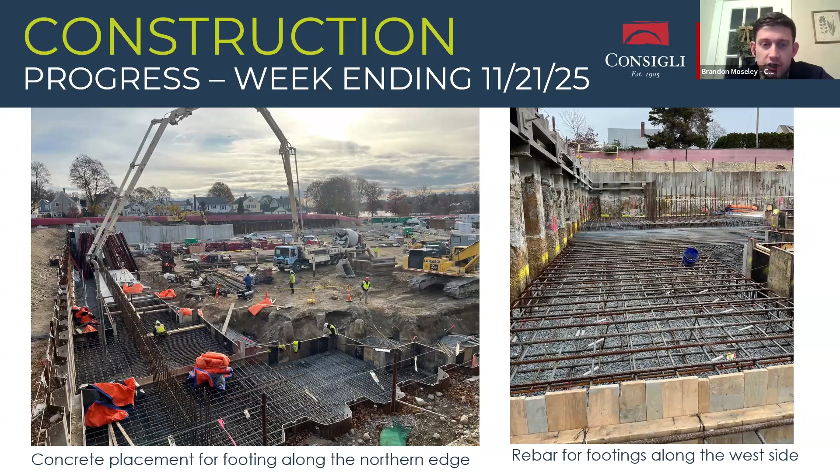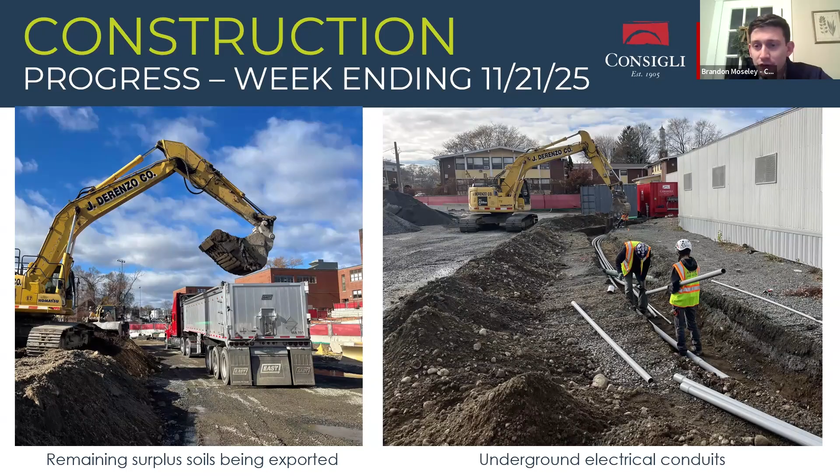Anise, our electrician, was on site doing some underground conduit work, which allowed us to also do some paving today. We did what we could under the parking lot and got some pavement down ahead of the worst of the winter. We got lucky with some nice weather today and for the next couple of days, which is great.

This is the rough grading that happened a week or two ago at that parking lot area, which is now all completely paved with asphalt.

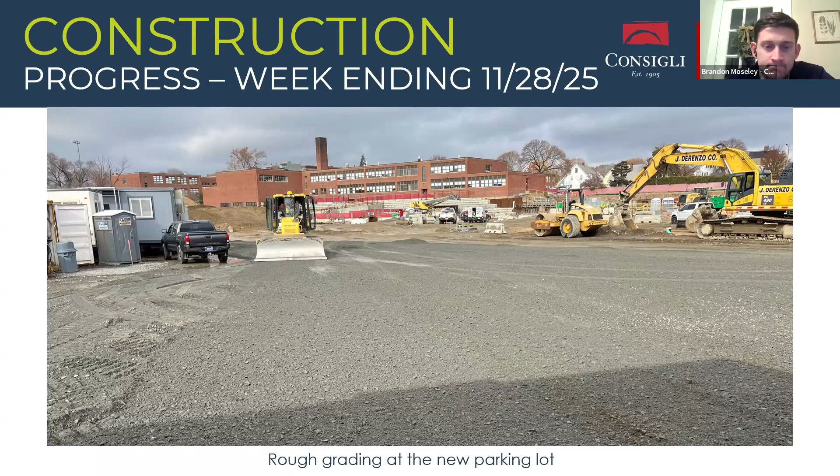This is a shot of a crane that was on site two weeks ago for the install of our grease trap. That exterior grease trap sits just outside the foundation footprint. It's buried underground, takes all the kitchen waste from any grease producing fixture, filters through there before it goes into any sanitary system, and then that's pumped out at regular intervals. So that's now done and buried, which is fantastic - another big underground element we can put behind us.

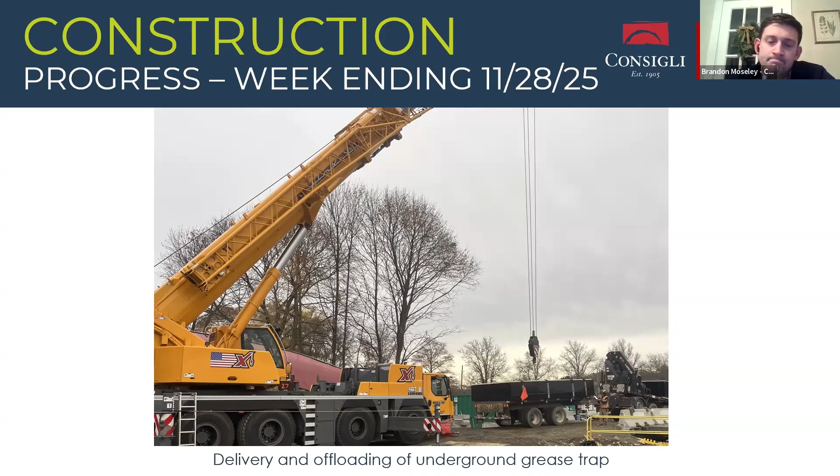This is a shot of the formwork up at that same area we looked at in the first set of photos. One side is up at this point, the week of 12/5. We've since now placed these, which is great.

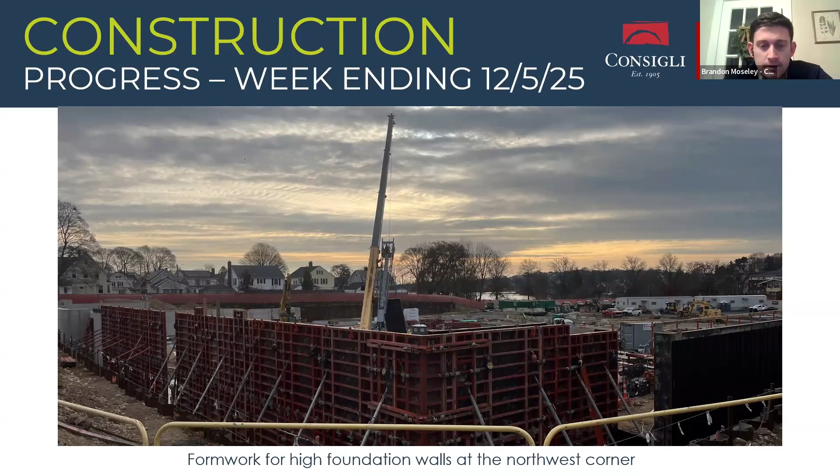Another shot of the foundation walls being complete. You might notice the different patterns here - you can see kind of vertical patterns where we did some form liner work. That stuff will be exposed as an areaway in the finished condition, strategically inlaid within the formwork to provide a more architectural finish that you'll see.

All these box outs here actually come into the main electric room, eventually coming in through the first floor up into the main electric room and into the second floor mechanical room. That was all pre-planned - MEP coordination has been ongoing, so those are intentional box outs to make sure we can get service into the building when we need to.

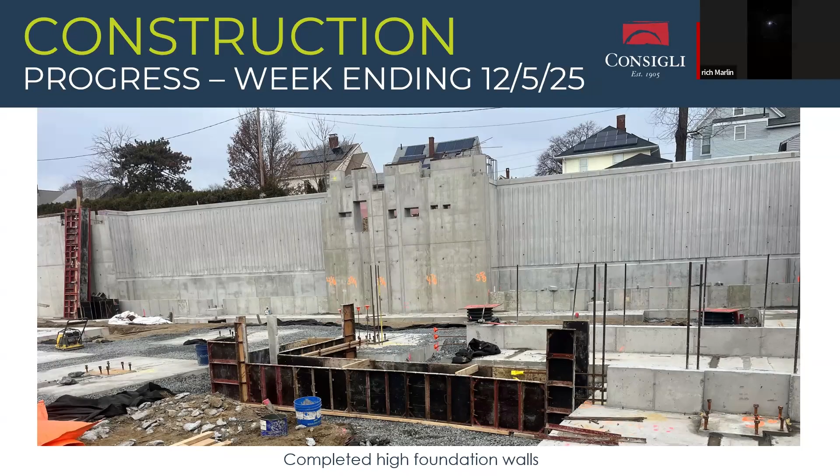Another activity we were working on just after Thanksgiving for the last couple of weeks was getting back to that Sisson ramp, the switchback ramp we turned over last summer. We had temporary railings in and had done our field dimensioning for our permanent rails. Those were fabricated and have been installed - I believe they set the last sections today. They'll be doing some welding of corners tomorrow, and we should be completely demobilized with that all complete by the end of the day tomorrow.

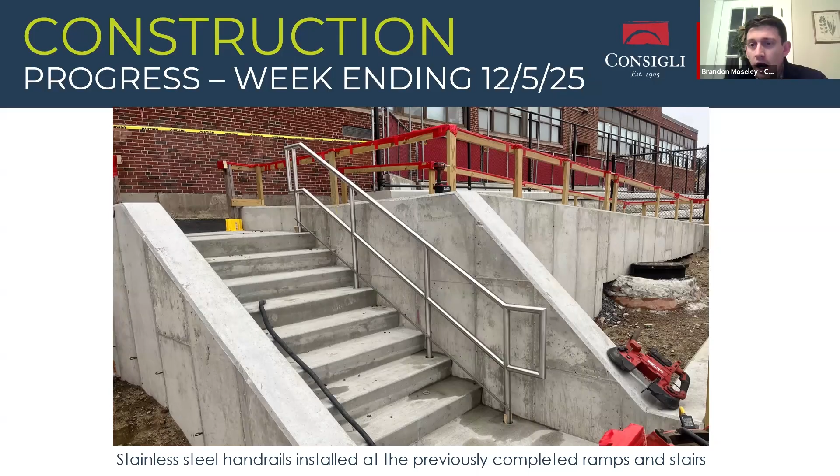Just big picture, I want to touch on schedule-wise. We've been talking about concrete being complete, moving on to steel, so everyone knows what to anticipate. We do have the crane coming on Monday - it'll be erected, so you're going to see that go up in the area of the building footprint. Our first steel is going to go up next Tuesday. Huge milestone for us to be starting just before the holidays and working through the holidays with the first section - great milestone for the team as we transition from site work and concrete into structural steel.

Mr. Mannion asked if the steel is on site now. The steel is not on site right now - we're going to see our first trucks on Tuesday morning, about 8 or 9 trucks. Some have slowly been ferried down from Canada into a temporary landing spot in Massachusetts to get ready for this. So some of it has made its way over the border, but nothing is on site yet.

One last quick question: how much longer can you put down the bituminous top coat? It's all weather dependent. We got lucky today - as you may know, the plants do shut down, and that's also a fluctuating date, but they've stayed open. We got the bulk of what we wanted done today, which is great. The large parking area just west of our trailers got done, as well as one of the two main entry roads.

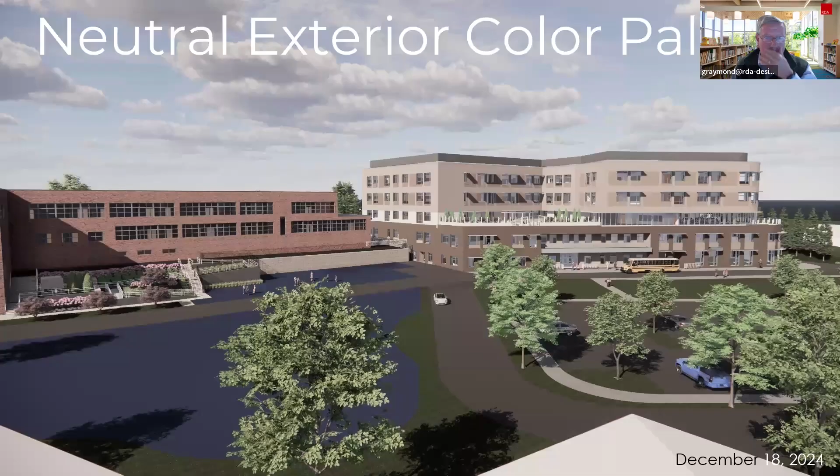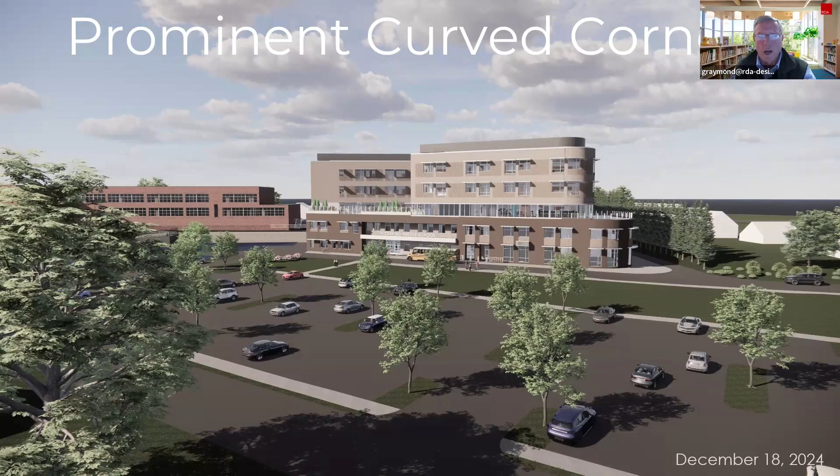So again, you saw these, you've seen these since a year ago. So we have the kind of neutral exterior color palette, and we have curves on the outside of the building responding to the site. We didn't want to have any sharp prows. And then we brought those curves into the building, where we have interior cores, and this is the curve on the cafeteria.

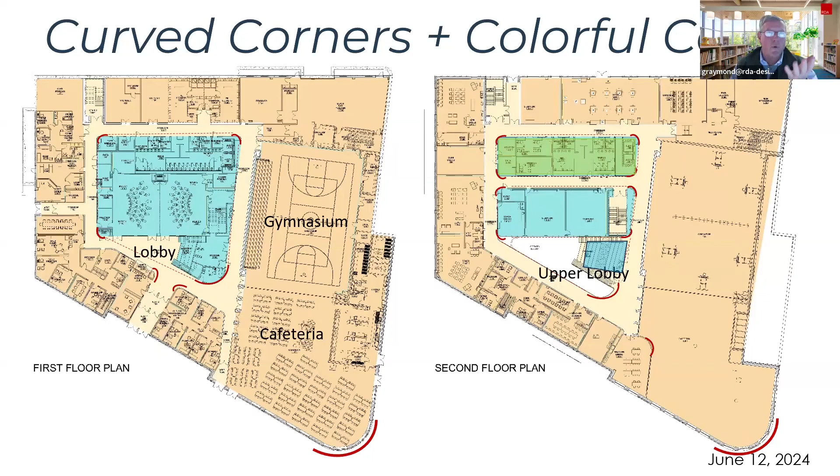The other thing that we had organized the building around, and I know you've heard it all before, but we have perimeter spaces and we have these interior cores. And so we've been focused on trying to give the interior cores various color patterns so that it's kind of a wayfinding device, and people inside the building can understand, as they use the building, where they are.

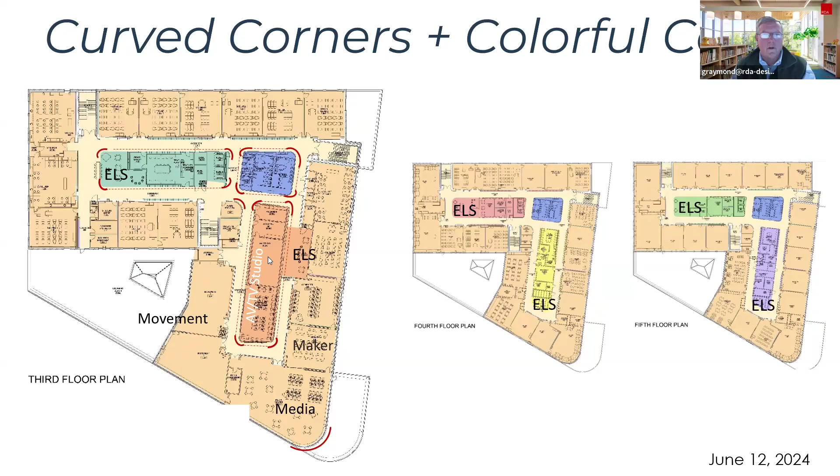We have like three cores typically on the upper three academic floors. And each one of the, well I'm going to say the toilet cores, we're trying to keep just consistent, but then the grade level academic cores, we're trying to have different colors. And so far that's worked out really well.

Where we were on November 19th, which was the last time, we had very saturated, very intense colorful patterns of tile on all these cores. And one of the feedback comments that we got was, wow, it's really powerful, and it might be too powerful.

And then we also had in the corridors, not the cores themselves but the other walls, more neutral colors, but still a pretty intense amount of pattern going on. So we got some feedback, and we went back and worked with the subcommittee and looked at some precedents.

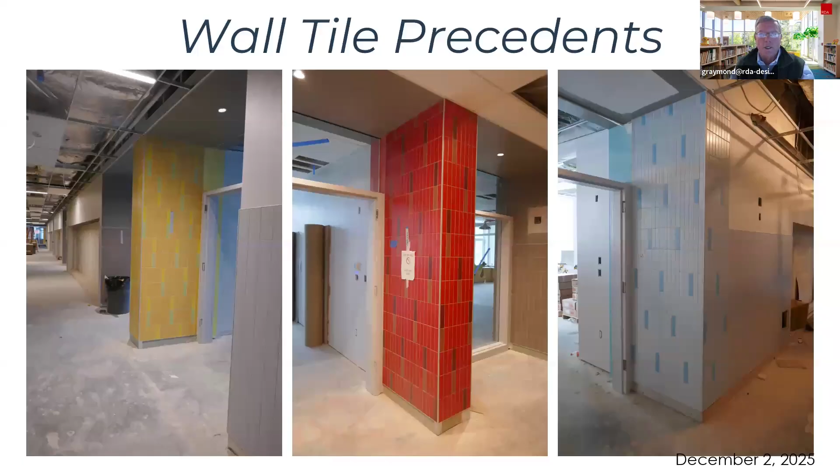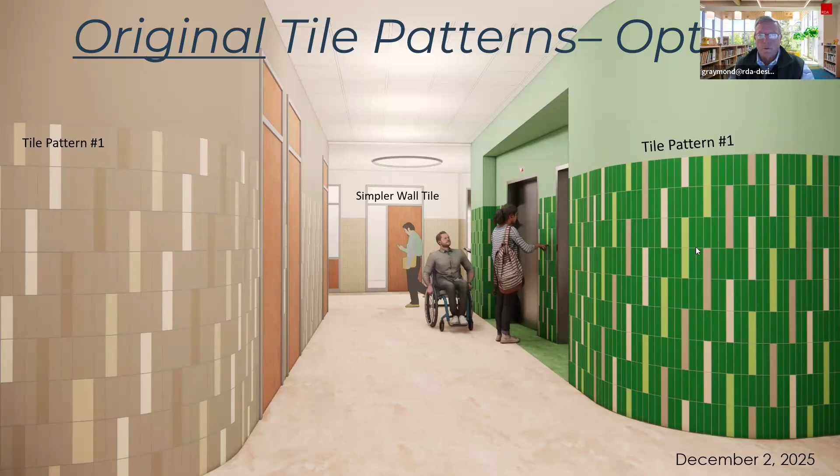But let's also take a look at this, which is very intense, a lot of green and a lot going on with the other accent colors. Let's flip it, so the field color becomes more neutral and the accents become the green. So we looked at a variety of patterns, and we went from this very intense one, where the field was green, to the field now being a neutral with green accents. This is the second tile pattern we looked at.

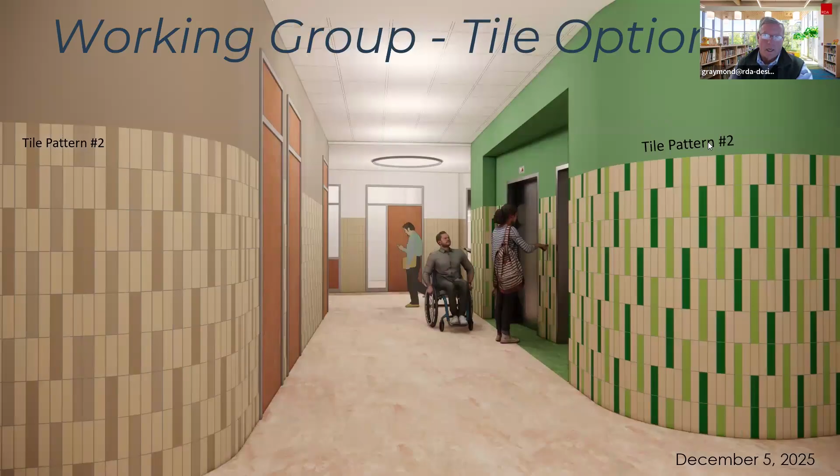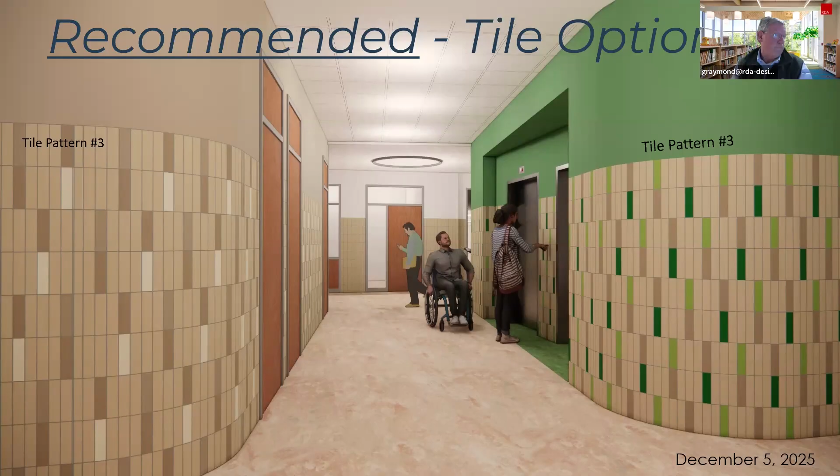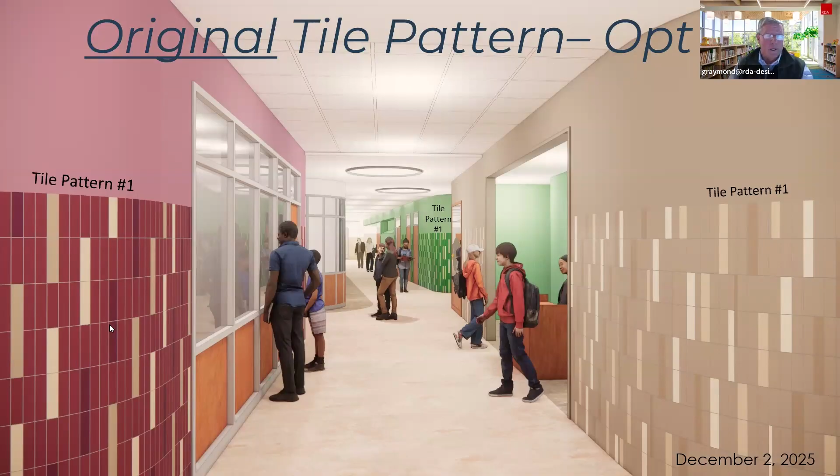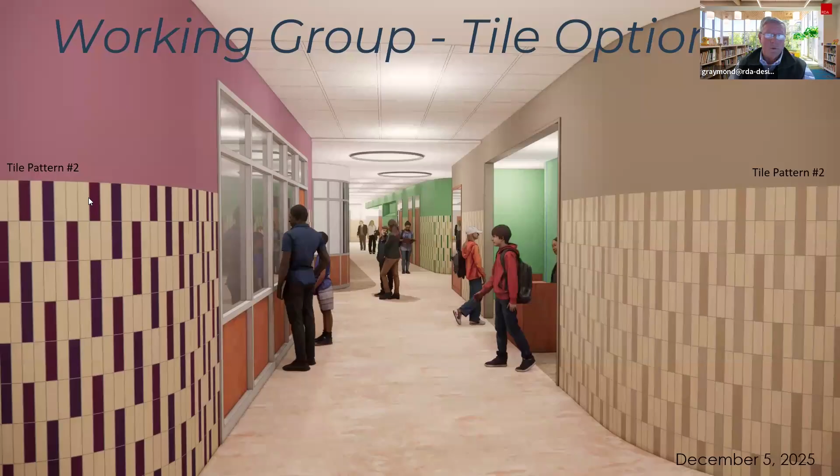So the same thing happened - just another example, but one of the other cores is kind of a purple color, and the original pattern had a lot of purple in the field with some other accents. Again, we flipped it so there's more neutral in the core and colors as the accents. This is tile pattern number 2, which we didn't pick. Tile pattern 4 was a little too dispersed, and we landed on tile pattern number 3.

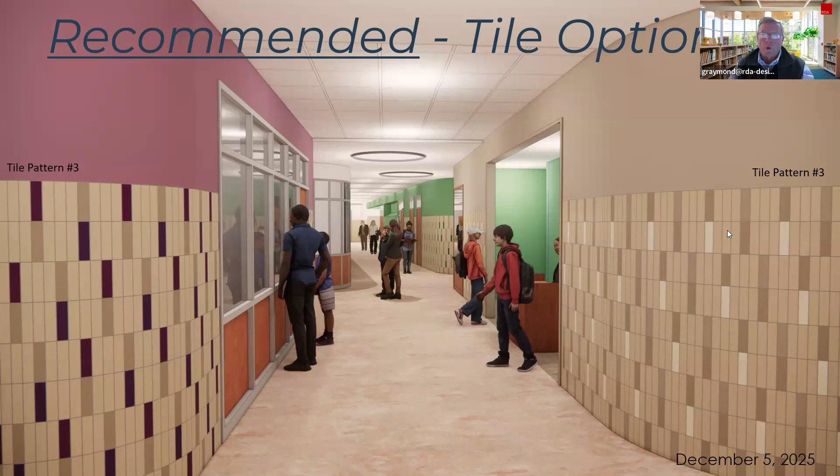I think this is really nice because you still get the pop of color with the painted gypsum board. You can't see it here, but there are lockers that will be the same color, and you still have the green accent. So you definitely still have the feeling that this is a green core and this is a purple core. And then this is the toilet core, which is more neutral, but not the plain wall tile, which is where we're headed at Pickering.

So I think the question is, when you compare what it really looks like with what the computer renderings throw out, things can look a lot different in real life. And I think everyone was comfortable heading in the same direction for Pickering.

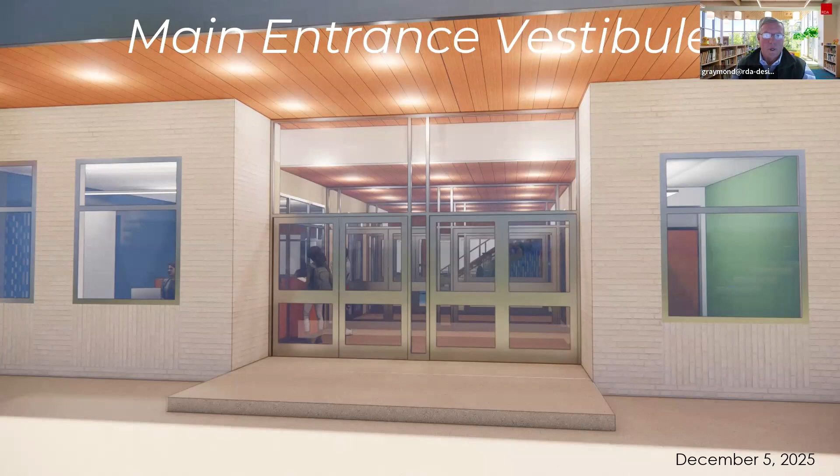So if we just take the glass out, what we are proposing, and I think everyone's comfortable with, is we have the cherry metal ceiling. What we wanted to do was keep it under the canopy outside, but then bring the same ceiling into the inside of the building so that you have some continuity as you go in.

The outside set of doors is here, and you check in, then there's another set of doors here where after you're credentialed, you can be buzzed in. But where the tile drops, there's yet another set of doors, because when you go into the second vestibule, you can go over to the service providers or into the main office, but you can't go into the school. That's for visitors and guardians coming in for meetings.

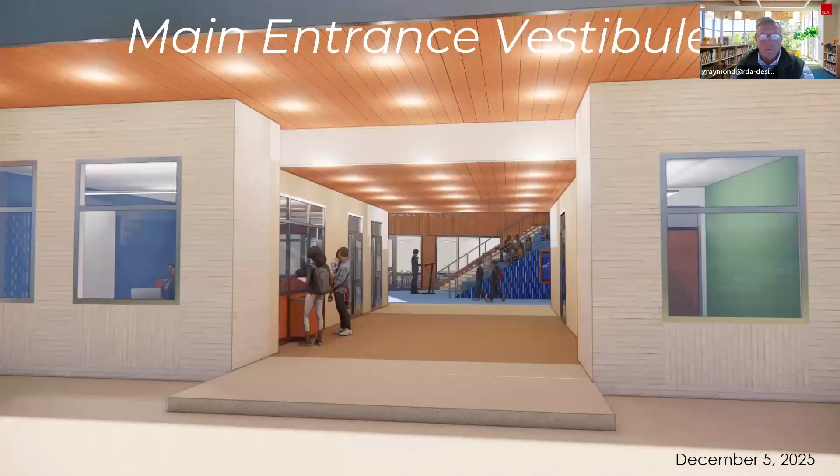So when we got into the two vestibules, this is the first one, in which the main office controls it and people get credentialed at a little counter. If they're coming into the office, they would then get buzzed in and go into the office through this door, but they can't go through those doors to go any further into the school.

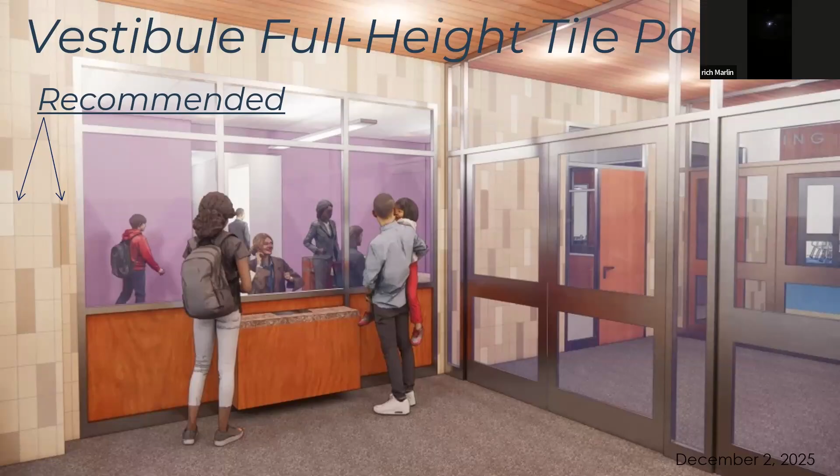In these two vestibules, we decided to stay with full height tile and keep the original pattern, because if this full height was all just one tile, it would be a bit boring, honestly. But once you get through the second one, you're into the regular corridor tile with painted wall above it, and this is where we just turn into the plain single color tile.

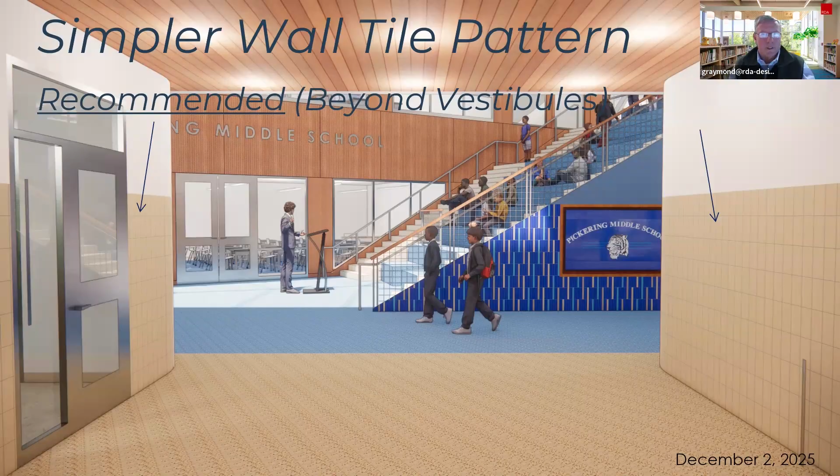Going back to the cherry, when you come into the lobby we have these acoustic panels. It's again cherry because it goes with the wood, it goes with the ceilings, and frankly it just feels kind of sophisticated and a nice finish. But they wanted to make sure of what that would look like.

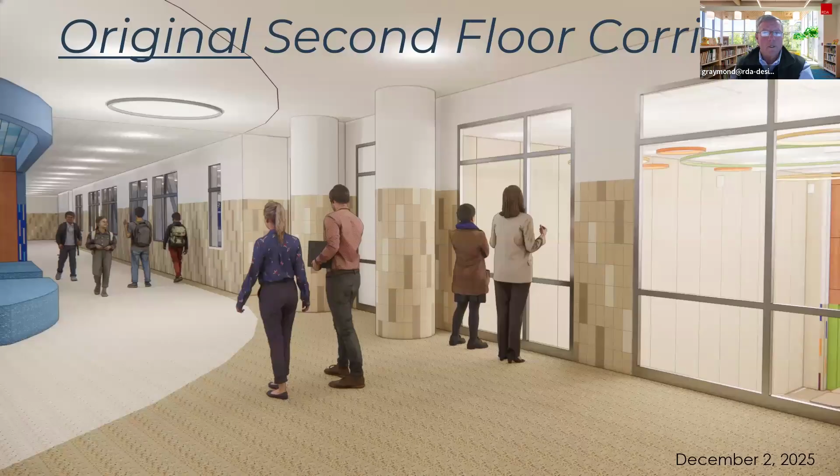This is where everyone wants to head, and frankly we're absolutely fine with it. It's just a nice, simple wainscoting. It still breaks up the height of the walls and still provides a nice, durable surface. So we're going from this, which I'll just say is a little in people's faces, to something that's calmer but still light.

The same thing happens, just with a couple different views. This is where we were, and this is what's being recommended right now.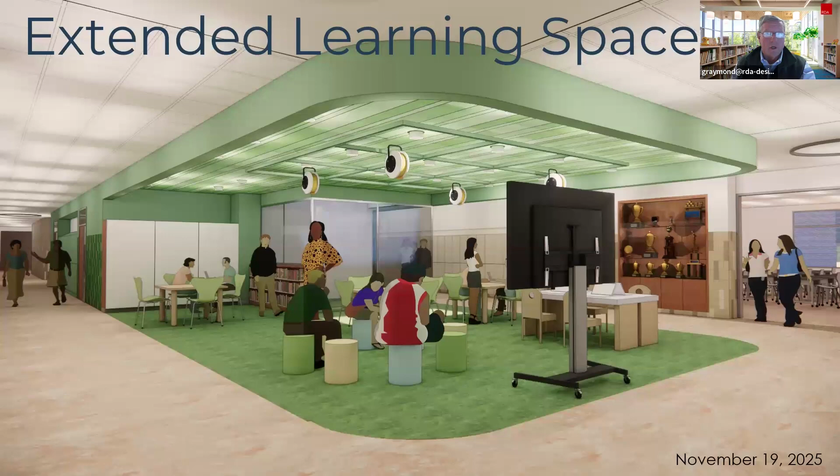So this is another view looking at it, and then this is what it would be like with what we're proposing tonight. There's one more view: you can see the original wall tile pattern and the original ceiling, and everything's just getting a lot calmer, with the single color and the warmer ceiling.

In the lobby, we decided that we would not put a wood look ceiling in, that we'd stay with the painted blue ceiling. And it's not just one shade of blue—you can see we're breaking it down into a number of colors, so it has some texture and interest.

The thought was that if we have this nice cherry accent wall and we put cherry up on the ceiling too, it's just going to be bland—just a big blob of cherry. This way, you have the nice warm wood contrasting with the blue metal ceiling.

So we decided to maintain it here, whereas on the academic floors we changed the metal ceiling away from paint. This is just a view at the second floor—we're still showing the old pattern, but this is all going to be simplified. And just another view.

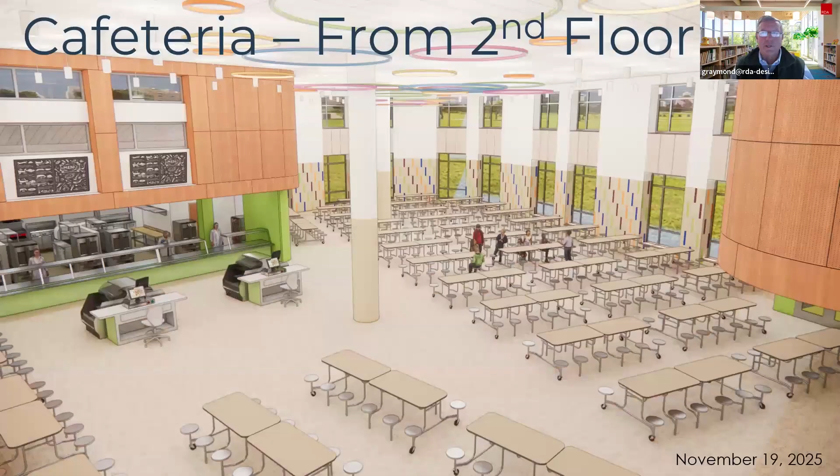The cafeteria, we didn't change—everyone was very comfortable with it, and we're excited to see it get built. The gym didn't change either. It's the school colors, and it has all these wonderful things happening, including all these bleachers that can get pulled down for a big performance of some sort.

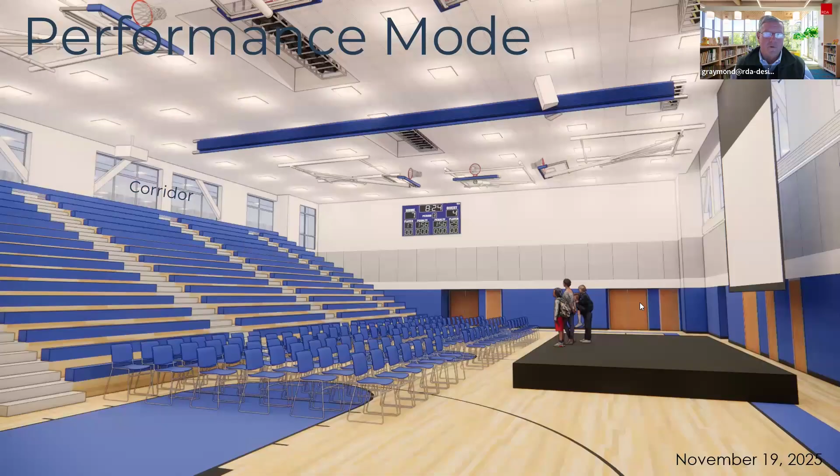So with that, I think it's really taken a big leap forward, and hopefully you're okay with it. Thank you, Gene. I can go back to any slide if people want, or take any more comments.

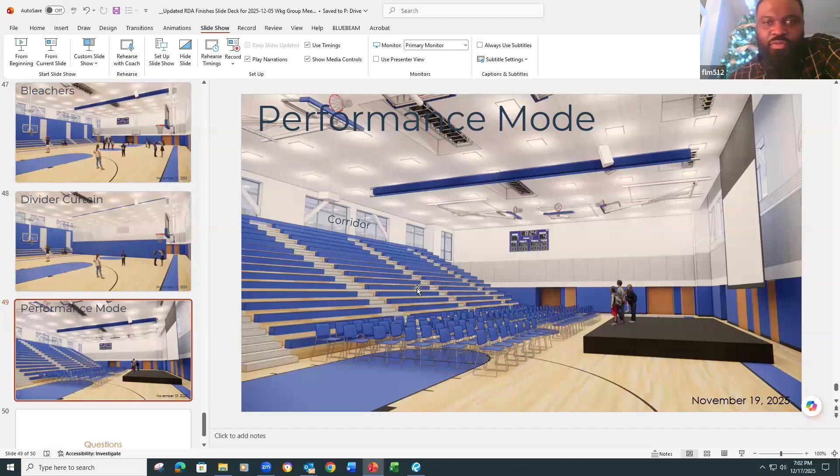Gene, I do have a question—how will the ceiling weather? It's cherry. It looks fine day one. It weathers really well. Give me a sec, let me see if I have any example of something that's been around over 5, 10 years.

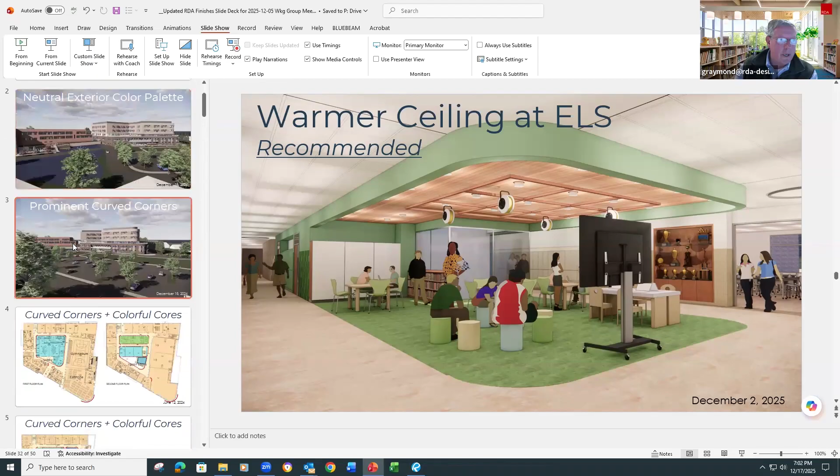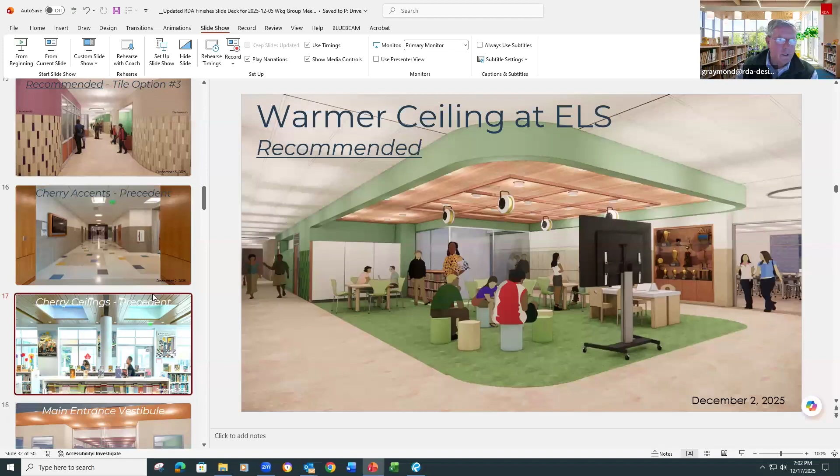If you happen to get over to Thurgood Marshall, we have it on the exterior and the interior. This is the library at Thurgood Marshall—same exact material, so we're not changing it, just the color, and it looks as good today as it looked when we put it in.

I think in support of that, Gene, it's important to note it's not wood, it's wood look—it's metal, so it's very, very durable. No maintenance to it, right? Nope.

Quick question, Gene—did you talk to people at Marshall about the size of the kitchen, and did you adjust that in your plans so it's a little larger than the one over at Marshall, with deeper sinks? We didn't talk to the people at Marshall directly. We talked to the food service coordinator, and we brought him the comments that we had heard from you guys during design.

And so we did adjust. I can't speak to the size of the kitchen because that was dictated by MSBA and by the space we had on the first floor. But we definitely did adjust the sinks, specifically so they could wash the pans and trays. They're the same size as the pans, so they can go right in the water and get washed. Makes it easier.

Thank you. You're welcome, you're welcome.

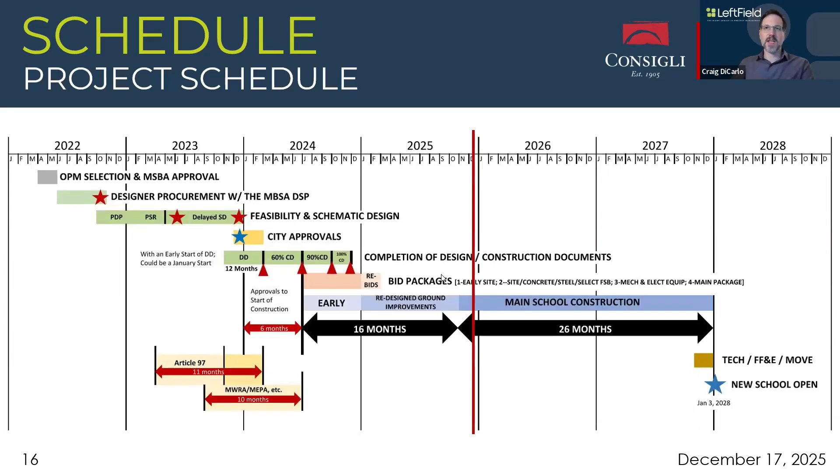So unless there's any strong opinions to the contrary, we'll take a look at the schedule and see if it makes sense to do it before or after, and then we'll send that out sometime between now and mid-January, so everyone gets the new date on their calendars.

Got our typical reminder, if anyone's got questions or wants to learn more about the project, we've got two resources: the project website and our YouTube channel. So point people towards them. And unless there was anything else, that's all we've got for you tonight.